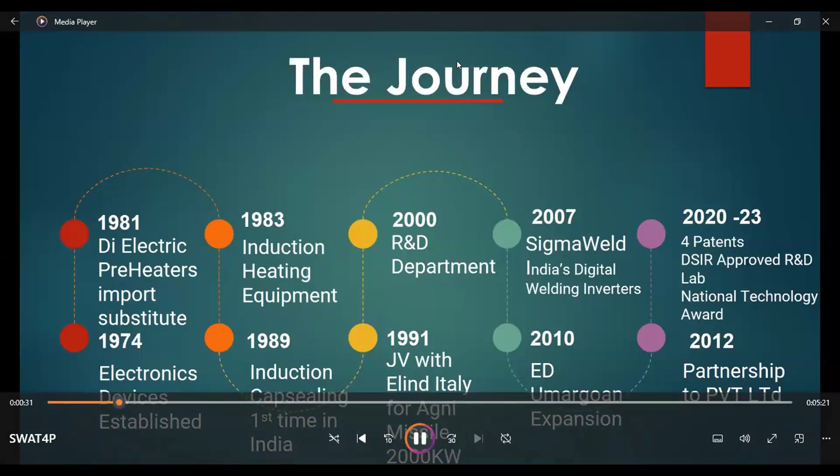Saurabh, next slide please. So just for Electronic Devices, we have about 287 employees today. We have got more than 10,000 customers and export to over 80 countries.

Saurabh, can you fast forward? So a few contributions of SigmaWeld.

The Chandrayaan-1 and Chandrayaan-2 solid fuel boosters were welded by our automation solution. For Gaganyaan, India's first manned mission, the heat treatment of the semi-cryo parts is being done by us. Titanium bundle welding for all the nuclear submarines that guard Indian waters is also done on our solution.

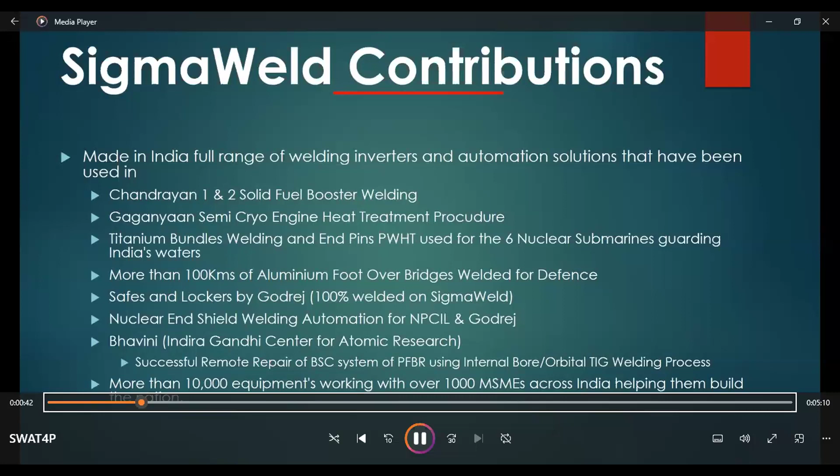All locks and safes made by Godrej are welded using SigmaWeld. We have contributed to NPCIL for End Shield welding automation. We've also done successful remote repair of the BSC system for the PFBR, using internal bore and orbital TIG welding processes custom built by us. More than 10,000 of our equipments are working with over 1,000 MSMEs across India, helping them build the nation faster.

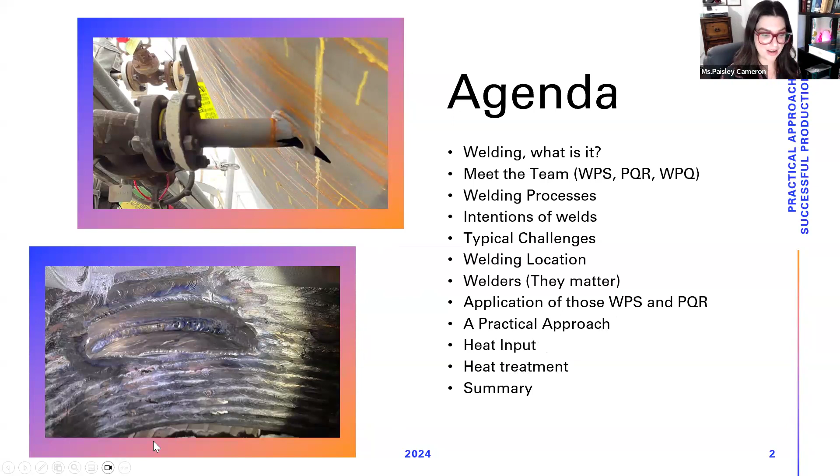So welding, what is it?

These definitions predominantly come from ASME Section 9, which is the American Society of Mechanical Engineers. Section 9 is the welding standard and code. If anybody is interested, or most people are likely familiar with it, if not, I can give a list of all the references at the end of the presentation.

A weld is a localized coalescence of metals or nonmetals produced by either heating the materials to the welding temperature, with or without the application of pressure, or by the application of pressure alone, and with or without the use of a filler material.

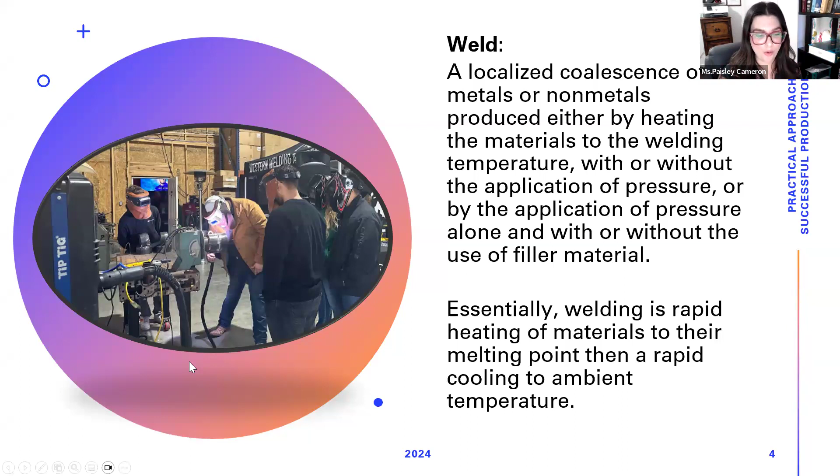Essentially, welding is rapid heating of materials to their melting point, then rapid cooling to ambient temperature. A mentor of mine many years ago said a weld is just a very small casting, and can be layered casting on there. So it's a very different way of looking at a weld. A lot of people see it as an intricate piece of joining predominantly metallics, but at the end of the day, it's a very small casting without a mold. So it takes a very specific operator or welder to manipulate that casting to do what you want it to do, or on the flip side, not do what you want it to do.

So we're going to go over meeting the team. I've gone over a few examples of this where I like to use a reference that welding, with the use of a weld procedure, PQR and a WPQ, is like baking a cake. Instead of the recipe, we're going to be using a weld procedure, because that is exactly what a weld procedure specification, or WPS as I'll call it going forward, is essentially a recipe of how you're going to be conducting the welds. It's like if you go online and pull up a really wonderful recipe, or perhaps you have something hidden away in the cabinet, or your auntie or mom has a recipe in their head that you make all the time. It's the same emphasis for welding. You need to have a specific list of ingredients, as well as a step-by-step guide of how you're going to complete the recipe, or the weld.

By definition, a welding procedure specification, or WPS, is a procedure specification written as a document providing direction to the person applying the material joining process. Again, pretty straightforward. It's a list of instructions with the ingredients of how to complete the weld itself.

When you get into procedure qualifications, or PQRs, this is essentially that somebody has done and followed the recipe. They have followed the weld procedure, the WPS, and showcased that it's actually doable. There's lots of recipes out there on the internet, or perhaps you've even tried to follow a recipe you know works, and when you've done it, it hasn't been very successful.

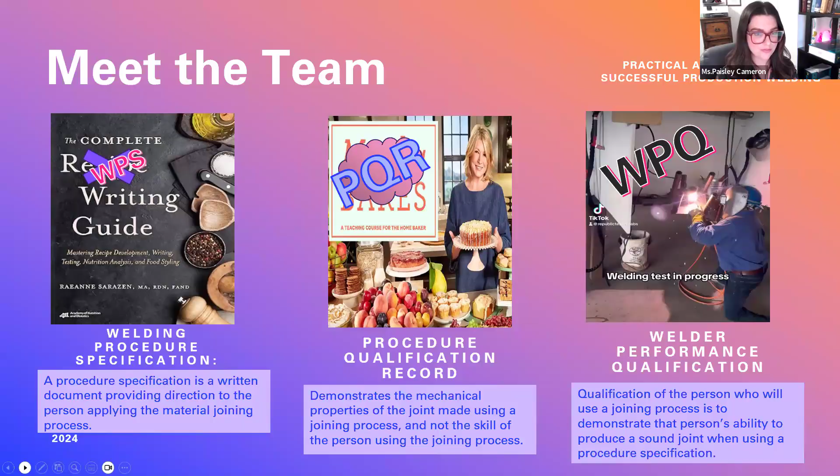So welding processes, again, a lot of these are probably going to be reviewed for you, but we'll delve into the details anyways. Shielded metal arc welding, or SMAW, otherwise commonly known as stick welding, is an arc process with an arc between the covered electrode, or rod as some call it, and the weld pool. The process is used with shielding from the decomposition of the electrode covering, without the application of pressure, and with filler metal from the electrode.

It's a very rudimentary welding process and manual in nature, whereas gas tungsten arc welding, sometimes known as TIG or heliarc welding, is an arc welding process which produces the coalescence of metals by heating them with an arc between a tungsten, which is the non-consumable electrode, and the workpiece. The shielding is obtained from the gas or a gas mixture through a nozzle.

SAW, or submerged arc welding, also known as subarc, is a welding process that uses arcs between a bare metal electrode or electrodes, depending if you need one or two, and the weld pool. The arc and the molten metal are shielded by a blanket of granular flux on the workpiece. So in this case, it's a very interesting welding process because you don't see the actual arc itself.

Gas metal arc welding, also known as MIG welding, again is an arc welding process that uses an arc between the continuous filler metal electrode and the weld pool, and the process is used with shielding from externally supplied gas and without the application of pressure. I'll note that a number of these do have different transfer modes. GMAW in particular has a couple options, but we're not going to dive into those specifics right now.

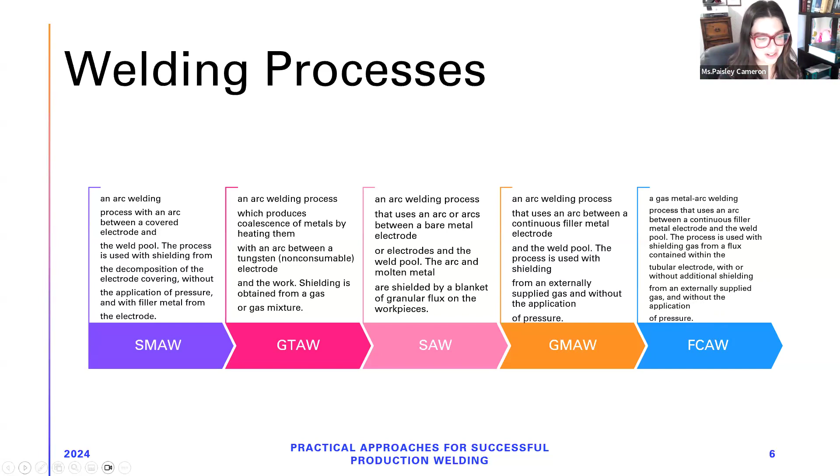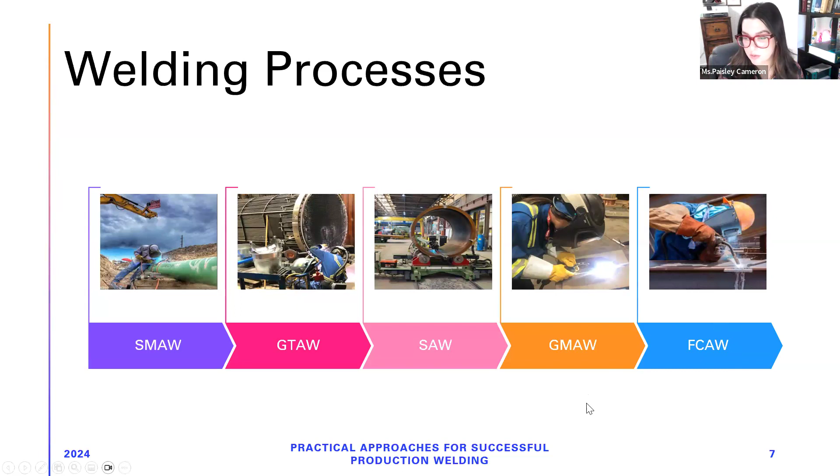Here we have gas metal arc welding. As you can see, there's quite a bit of a nozzle off of here, as well as what we'd call a gun or a welding gun, which may or may not be difficult to get into specific tight spaces. And then finally, we have a picture of the flux core, very similar in nature to the MIG welder, where you've got a sizable gun on here. Again, very similar - you may or may not have challenges getting in or out of locations.

A really important thing when it comes to the actual practicality of welding is what are your welds intended for? Do you have a specific code of construction? Is that known? If not, you should probably figure that out. That becomes very important when you're actually completing your welding. That dictates your weld procedure requirements, your PQR requirements, your welder qualification requirements, from a bare minimum or above and beyond - all of these additional testing requirements, very specific welder technique or weld procedure techniques. It's very, very important to know the code that you're actually welding to.

Most places here in the States and a few other places, it's governed by ASME, the American Society of Mechanical Engineers. That can fall under ASME Section 8, predominantly Div 1, which is vessels and heat exchangers. B31.1, which is power piping, a lot of boiler piping and all that. B31.3 is your process piping, so it could be anything from plain Jane water to very lethal service or carcinogenics.

Then in Canada, we have CSA W59, which is a structural welding code - bridges, beams, buildings, all that. There's also Z662, which is a pipeline code in Canada as well. In the States and a few other places, they use API 1104, which is also a pipeline standard. It has a whole different slew of requirements from ASME itself, so it's very important to know which you're using. You can't necessarily use something appropriate for ASME that works for 1104 or Z662.

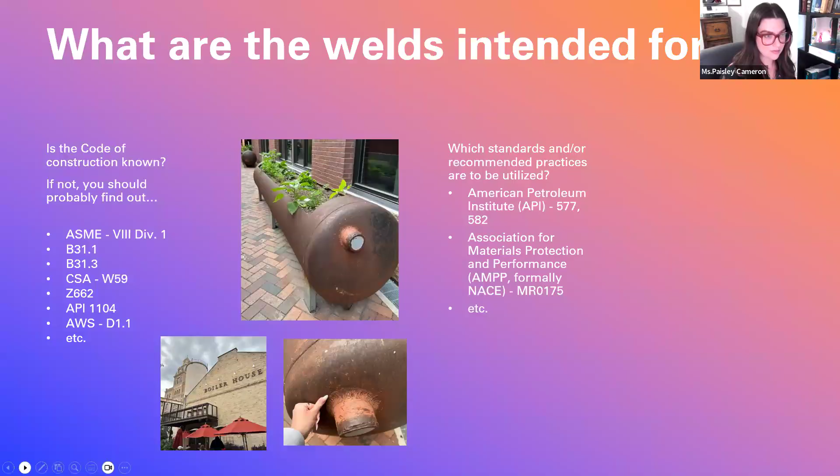Going into what are your welds actually intended for? These are their specific internal requirements, typically tighter knit requirements based on previous learnings. A lot of those come, unfortunately, from failures, and hopefully not life-altering failures, or in a safety or reliability aspect. But typically they are, unfortunately, things that have failed catastrophically or have caused catastrophic effects to individuals or the environment.

And when they go through failure analysis or post-mortem assessment, not always, but sometimes you can pinpoint specific reasons or potential additives to the reason of the failure, such as the welding technique, stress risers, inadequate heat treatments, inadequate control for your specific bead placements, especially when it comes to bead sequencing for temper bead applications or any of that jazz. So very important to go through what are those specific learnings or requirements.

If it's been known that, for example, those butterfly cellulosic welds in certain applications have lasted the test of time, so to speak, 40+ years, that's typical industry lifeline, or do they fail every year, every 6 months? It's like, okay, why are we doing that? We don't want to have those failures typically. So how do we prevent that? Can we control that from a welding standpoint? And the answer isn't always yes, but a lot of the times it is, which is really neat.

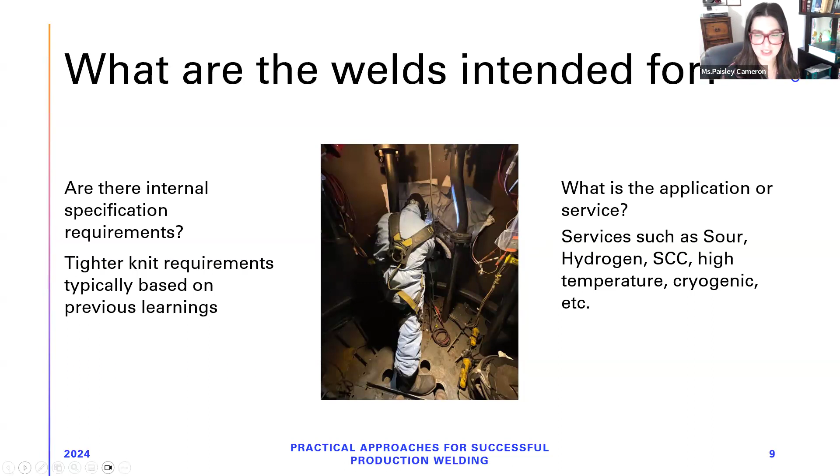Now, if that type of cracking happened out on your water trough for your livestock, would it matter as much? Probably not so much. At that point, you could probably just slap some JB Weld on it, who knows?

All right, so going into typical challenges in industry. Here we find a lot of issues on your weld procedures particularly. A lot of weld procedures in the IFC, or issued-for-construction era, can just send out, hey, we're welding this to this, here's a procedure.

Not having that specific understanding of what those weld procedures are going to be utilized for, in terms of thicknesses of base metals, the applications of it, such as the services or intentions of it, specific thickness requirements, heat treatment requirements, how they're actually going to be conducting the weld.

In particular, this is a very interesting photo. I can't talk about the specific details, but as you can tell, a catastrophic failure did happen here. And for those of you familiar in the repair world, I hope you are internally screaming, because this particular situation was quite horrific.

You can even see from this aspect, and I'm not sure if you can see my mouse or not, but you can see on that vessel in the top left corner that the welds are quite, I'm going to use the word ugly in nature, and they're very square.

In this particular case, when we went through the assessment, the weld procedures were submitted, and it was just typical carbon steel to carbon steel. They said these are the thicknesses that we're welding. Okay, no problem. However, the application of it was not appropriate in nature, as you can tell on there.

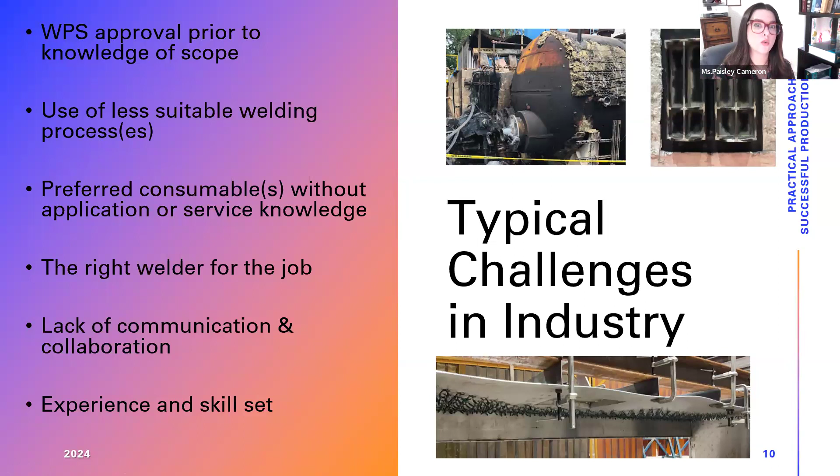So, where is the welding taking place? This may seem like a very, very simple thought process, but it becomes very, very important.

Here on the top left hand, you will see a welding shop that has many bays and booths. Welding shops can be wonderful for specific jobs. In this particular case, these are obviously going to be quite small in nature jobs, as you can tell by the size of each of those booths.

On the bottom right hand, you see booths in there as well, but this particular component is out in the open. It's on rollers, there's lots of space. So you can sit there and understand, okay, this is in a shop, fantastic, but do we have all this open space to do this work, or are we in a very constricted or restricted area?

Very, very important. You'll also see on the bottom left-hand side a photo of myself inside a stripper column. As you can tell, again, I am not a very large woman, but that is a very, very tight spot. There was a number of weld repairs that needed to take place in there.

So looking at the other two shop components, the one with the nice open area versus the one with restrictive booths, then you go further into sense, inside a very small diameter tower, very high up, to complete those repairs. Very, very important in that sense. That can make or break a successful weld.

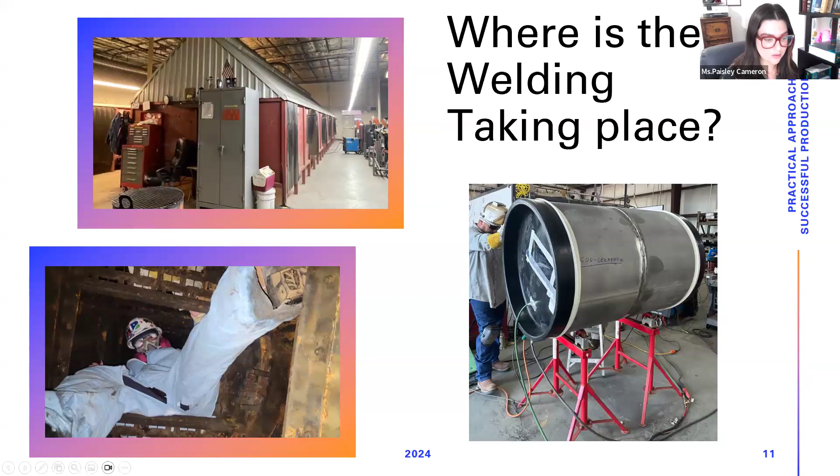Now, when it comes to applications, you may not always have the choice to do it in the nice, comfy, temperature-controlled, spacious shop. A lot of times you're going to have to be in those very tight, restrictive areas, as you find myself in there completing a weld repair.

Location, location, location. Very, very critical. A lot of people don't take this into consideration. It seems very intuitive in nature, especially when you're looking at the slide. Oh, are you doing it in a shop? Oh, are you doing it in the field? Awesome, okay. But do you sit there and think about that?

Do you understand what the applications of that procedure are going to have on restrictions, or lack thereof, on the welder, on the ability to inspect it, the ability to make sure that it's actually going to be a mechanically sound, rigid joint?

In the shop, you really need to be cognizant if you have different areas for ferrous and non-ferrous welding. A lot of people call that the white shop or the white area. That is very important for materials such as duplex stainless steels, some other nickel alloys, titaniums, zirconiums. Very important that it's segregated.

If you have in the shop one bay for white welding or alloy, and you have low alloy chromes adjacent to it, that may sound like a very silly aspect, but you can have a lot of contamination between the two, which can make or break those welds in the field. It may not show its ugly face immediately once you do your inspections, but it's likely on the long run, unfortunately, that it can cause those issues.

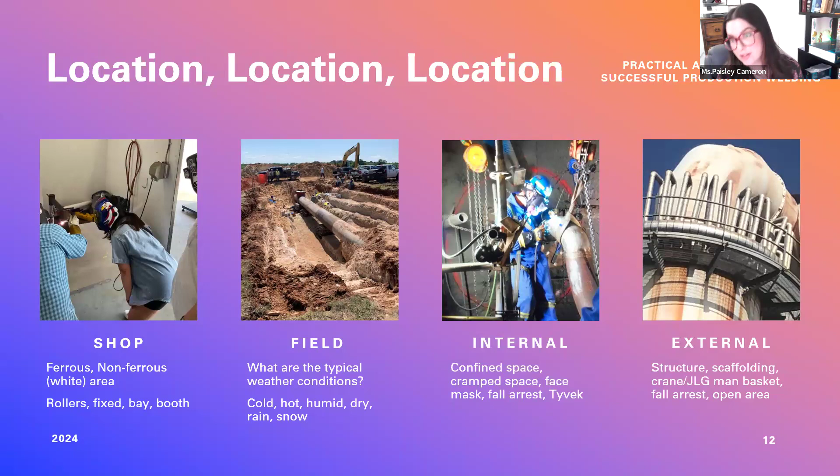Is it windy? I've been on many cranes and man baskets at very, very high locations, and you can feel those suckers move. Now try doing that for a very specific application, putting a weld bead or that very small casting on there, tied off in a man basket that's moving and your components moving. Again, things to consider on that aspect.

So let's talk about the welders. Again, we're diving into the experience and skill level of the welders particularly. I'm not sure about on the international stage, but there is a very big gap in North America on welders itself.

I believe the average age of a welder right now is 55. And here in the US and Canada, typical retirement age can be 55 to 65. You do find the odd gentleman, mainly gentlemen but women as well, that will stick it out to their 70s. I know a few of them, and they are tough as nails.

But a lot of people will retire, and if you're not having the appropriate training for the younger generations, you may not get the same output. You'll hear, well, we've done it before, or we've always done it this way, or where's our golden arm. Well, those people may not be available any longer, or have they got paid more to go elsewhere in a more comfortable job? That happens all the time.

So you really need to understand what is the skill level, not always necessarily experience, because you can have 10 years of experience, but really 1 year 10 times, and them not be awesome welders or very skillful welders. You want to understand what is the skill level of your welder. Just having that ticket, your WPQ or your welder qualification, doesn't necessarily mean that they're the right person for the job. A lot of additional destructive testing or mock-ups can be applicable, especially when it comes to very sophisticated repairs or very important new construction implementations.

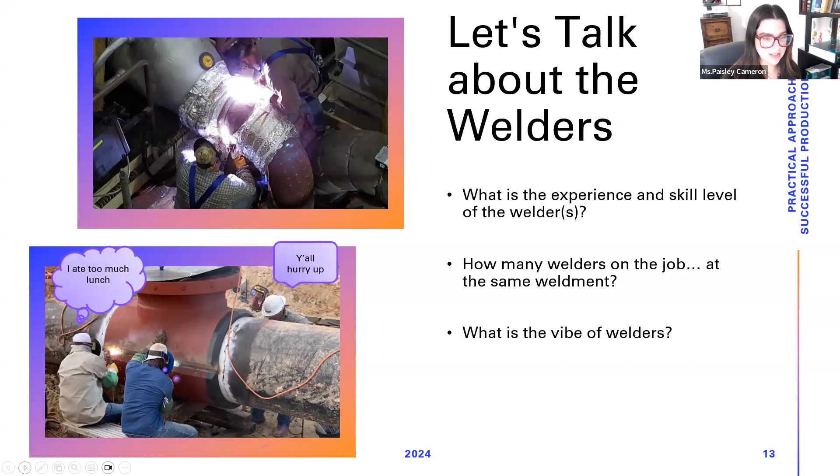Do people understand what they're supposed to be doing, and does it make sense? Just because they understand it doesn't mean it makes sense, and just because it makes sense doesn't mean people understand it. I'm a big advocate for sitting and talking with the specific welders on a job, if appropriate, and walking them through their scope, because a lot of the time the guys and gals doing the work don't have the same viewpoints as you do.

My fiance says this all the time and tries to broadcast it to the wide public. A lot of welders - not in a condescending sense - don't have a lot of education, and that's fine. Some of them, despite not having education, may be able to comprehend very sophisticated repairs, and some may not. You need to sit there and, I don't want to say dumb it down, but make it digestible for the people you're working with.

When you have a very sophisticated repair plan with drawings and fabrication all well thought out and spelled out, that's awesome. But just because you as the engineer, quality person, owner, or project manager understand all the steps doesn't mean the person actually doing the job does. So breaking it down and saying, hey, do this, use that, here's a picture of how I want you to weld it - that might be very helpful.

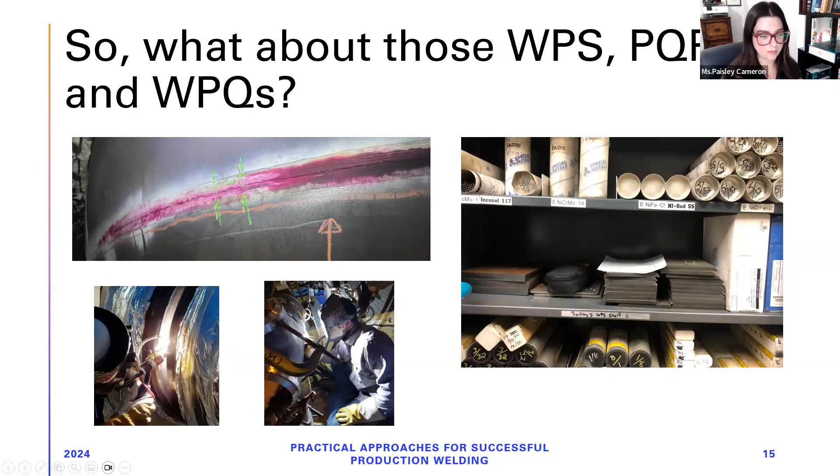So your approach matters. This was a very interesting job, up in a northern region of Canada, on a steam methane reformer in a hydrogen production unit. This particular place had a loss of containment resulting in a thermal release on another part of the plant.

They came through and did some opportunity inspections and found through-wall cracking on some of the outlet manifolds. As you can see, it's beautiful cracking. If it was going to crack, this is very beautiful welding, a very beautiful crack - unfortunately right in the weld, which is what you want in that sense.

But we went through and had not just the weld procedure, which was already qualified, but the specific welders flown in from the UK. You can go through and handle the really nitty-gritty details, taking a job or a crack or repair from something like this - having the meaningful application while working with the welders, talking about the bead sequencing, understanding the appropriate consumables, understanding how the weld's going to be done, monitoring it in nature, and planning how you're going to complete this. Obviously there's those circumferential 360 welds, and it's very tight spots below in particular, because you have all these outlet pigtails shooting out, so it's not the easiest place to get to. But that application can make or break your weld.

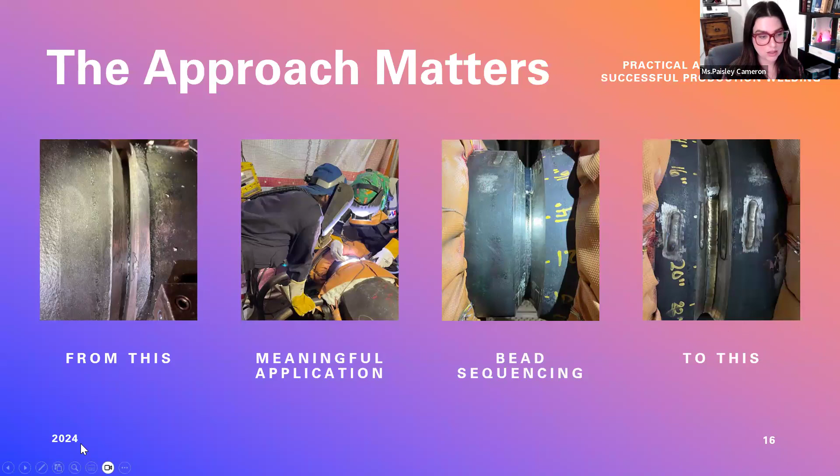I know we're running out of time, so I'm going to speed up a little bit. But again, this was a very specific job - a proprietary material for very high temperature applications. So your run-of-the-mill weld procedure and welder was not going to suffice. I do a lot of work on steam methane reformer outlet manifolds in particular, and one of the biggest things is making sure you have the right welders and that they understand the scope and have the experience to do it, because these are very sophisticated pieces of equipment that can cause very significant loss of containment. So you want to make sure you do it right the first time.

So heat input - this is something that a lot of people talk about in the welding world, either people that understand welding to a reasonable degree or people have no clue about it. I chose to talk on heat input in particular because people throw it around like it's a roll of dice.

So is the heat input important? And when do we know that it is important? Because if you do have heat input and it's important, in ASME Section 9 world, your supplementary essential variables are invoked. That means your toughness is very important, or your low temperature application for crack resistance. A lot of people want to focus on hardness, but in my experience, and predominantly in the metallurgical world, toughness is very, very important. It's your resistance to cracking, and we don't want welds to typically crack.

So this may not just be the application of low temperature, just as we saw on the slide prior, which is a high temperature application with a high nickel chrome alloy, which you typically wouldn't have an issue with cracking, but in that case you did. So toughness is very important.

Heat input can be also important for specific critical repairs, even if it is base metal, carbon steel boilerplate on that essence. But due to the thicknesses, or the piece of equipment, or the aging or service requirements of that equipment, it can be important to monitor your heat input. Duplex stainless steel - very important for your heat input to be controlled. Temper bead or controlled deposition welding, as we talked about, is very, very important for your heat input.

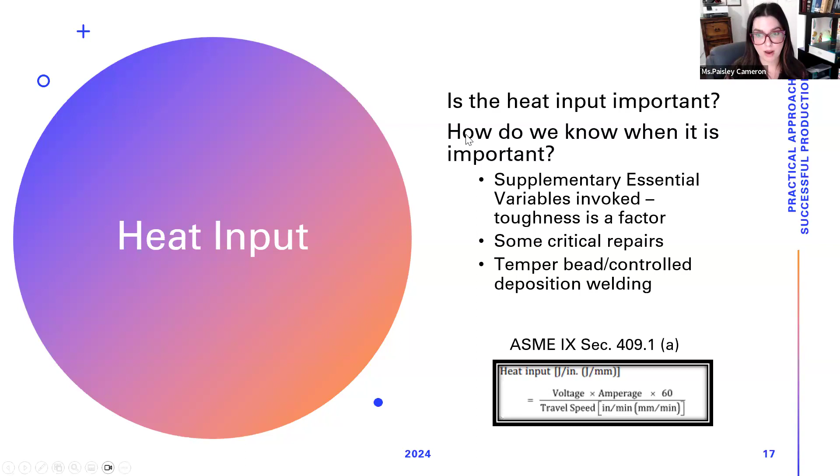So your heat input practically, again, talking about the people who are conducting the work - these are going to be your welders. If you tell them the heat input must be this, a lot of them, not all, but a lot, are going to look at you like you've got 3 heads. They're going to say your heat, that's your amperage. And in a lot of welder terms, that is your amperage. Turn your heat up, okay - turn your amperage up. Turn your heat down, okay - turn your amperage down.

Where what we would mean in the welding engineering or materials engineering or mechanical engineering aspect isn't just your amps. Your heat input, as we saw in the prior slide, is just one portion of it. You've got your amperage, you've got your voltage, which is essentially your resistance or potentially your arc length depending on which welding process, and you have your travel speed.

To get your heat input to what you actually want it to be, your best approach is to give the welders the travel speed and their amperage. Their voltage - there's not as much control on it, especially in more manual processes like TIG and stick. So if you give a welder, hey, this is going to be your amperage range, and this is how fast you need to be traveling with your wire, you will be a lot more successful in getting the actual heat input that you want, or the range of it.

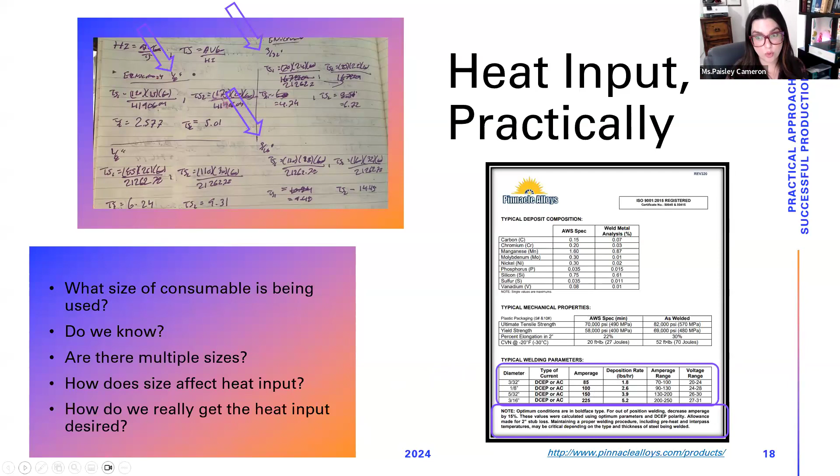Your interpass temperature is the temperature of previously deposited weld metal or adjacent base metal immediately before the next pass. That can become very important for solidification and hot cracking - very, very important for monitoring, especially for specific austenitic materials, predominantly your austenitic stainless steels.

And then going into your post-weld heat treatment, which is the application of subsequent heat after welding - a lot of that becomes very important for your chromes based off of the residual stresses implied from welding. Your solution annealing is a heat treatment which alters the metallurgical structure of a material to change its mechanical or electrical properties. It becomes very important for those high temperature application materials, as it will prevent a lot of embrittlement phases or cracking in that essence.

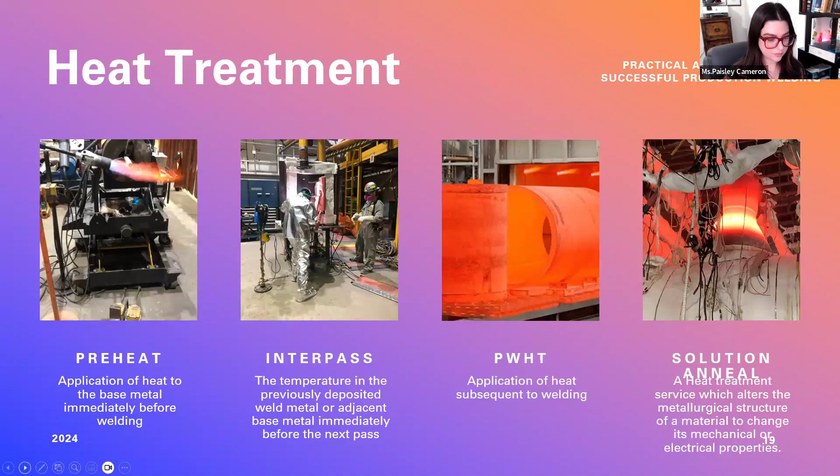For heat treatment methods, I've only talked about 3 here in particular, but there's a few others. So flame impingement, you have induction, which is kind of a newer thing coming to North America. And then you have electric resistance heating, pads or chiclets, but there's also furnaces, so how you're actually doing the heat treatment.

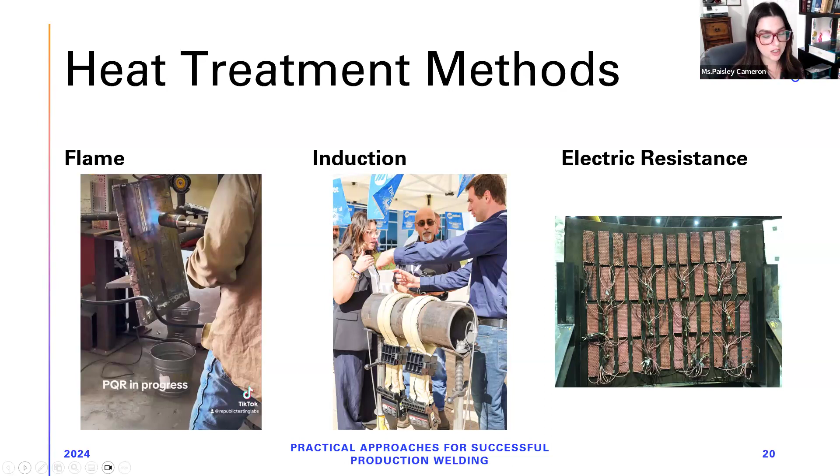I did a very interesting job out in Germany for an HTHA, high temperature hydrogen attack job, where they wanted to complete post-weld heat treatment on an entire vessel that had been in service for 35 years. We looked at doing flame, electric resistance, and building an entire furnace around it. There's many options, so don't let your imagination restrict you. Look at all these different things because those crazy ideas might just work. I've done a number of jobs where we've built furnaces around pieces of equipment in the field, which has been very neat, a lot of challenge and work, but very doable.

As a summary, make sure you look at the intentions of the weld. What are the codes, standards, recommended practices, and services the weld must meet? Where is welding taking place, the shop or the field? Is it internal or external? What are the climate conditions? What welding processes are being used, TIG, stick, subarc, MIG, flux core? Do you care about heat input? Do you have toughness concerns? Make sure you remember how to communicate that.

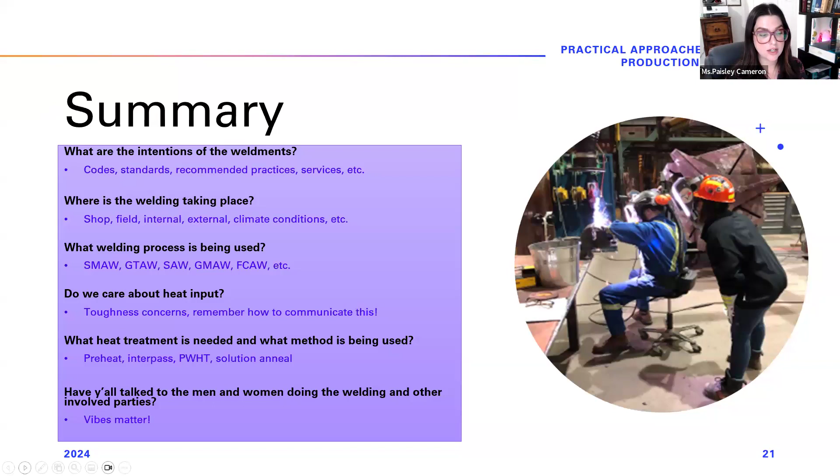What heat treatments are needed and which methods are being used? Are you monitoring for preheat, interpass, post-weld? Are you doing solution anneals? Are you using flame, induction, electric resistance, combustion, etc.? And have you talked to the men and women doing the welding, or all the other parties involved? The vibe really matters. It's very important that everybody is communicative, collaborative, has the skill set, and proper training, because at the end of the day, you do not want your welds to fail.

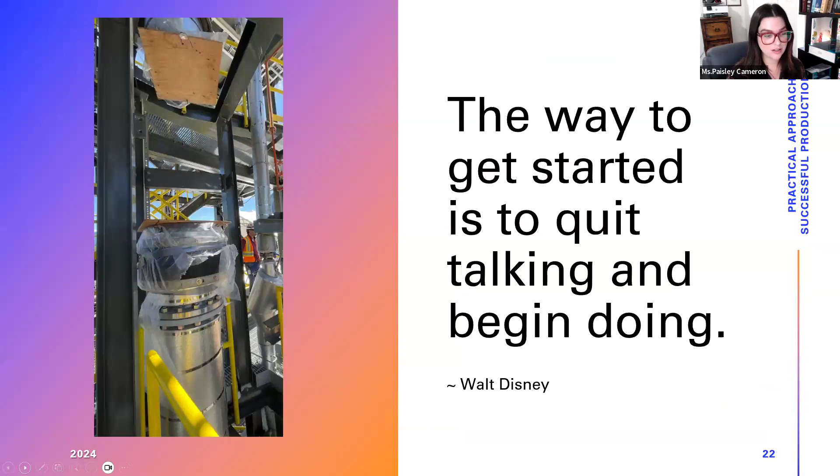Here I've got a very cute quote by Walt Disney, and this was a very interesting job, a pilot plant that sat stagnant for quite some time. The quote goes: the way to get started is to quit talking and begin doing. So don't just talk about it, make sure you actually have an action or a response to it. And thank you for listening.

I think we're probably right at the 1 hour mark. Thanks a lot, Paisley, this was a really wonderful talk, very basic, very to the point. And we have a lot of interesting questions in the Q&A, so if you would like to take a few of them up.

Yeah, most definitely. There's a Q&A button at the bottom, let's see. Oh, 25, wow, and there are a few more in the chat, but we can start with the Q&A. Do you want me to select ones and answer them, or? Just answer them randomly, and whichever you do, we'll put a tick next to it. Maybe you can take a few of them, and the remaining we'll send you the full questions, and you can answer them and send us back. More than happy to do so, and share it with all the participants.

An anonymous attendee mentioned: I wanted to know more about WPS and PQR used to qualify the process of brazing, be kind enough to elaborate on it during the presentation. I'll note that. I'm actually going to ASME Section 9 code committee meetings next week, proxying for somebody. One of my very good friends is the chair for brazing, so I'd be happy to get you in touch with her. Brazing is not my specialty, but I wanted to point that out. Maybe we can request her for a special session on brazing. Yeah, she's fantastic, we'll be in touch with you for that.